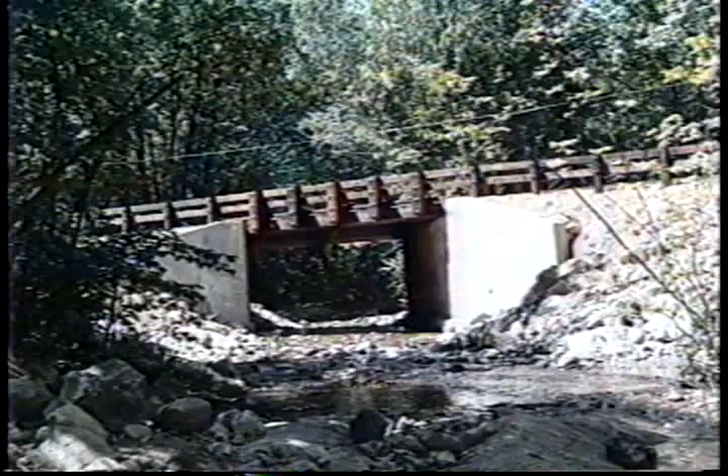Recognizing this threat to America's crumbling infrastructure, the United States Congress funded the Timber Bridge Initiative in 1989. Using methods pioneered in Ontario in the 1970s, over 200 demonstration timber bridges have been built across the country to show that small communities can replace their bridges in less time and with less money using locally grown, pressure-treated wood, rather than concrete and steel in construction.

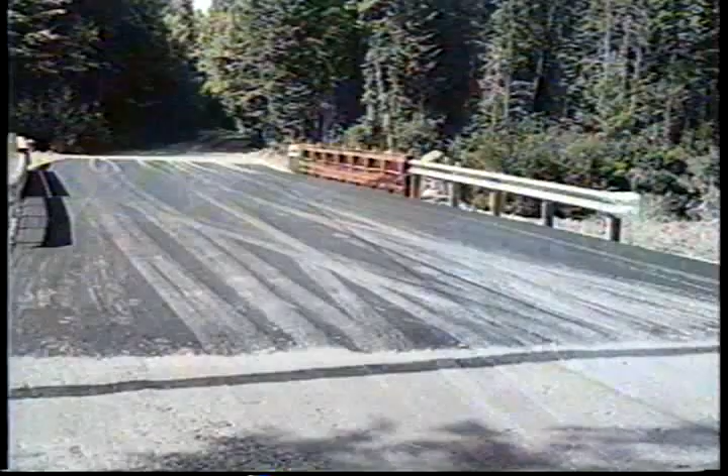Rhode Island RC&D is very interested in this because it does promote rural development. It has local people solving local problems and using local resources to do it.

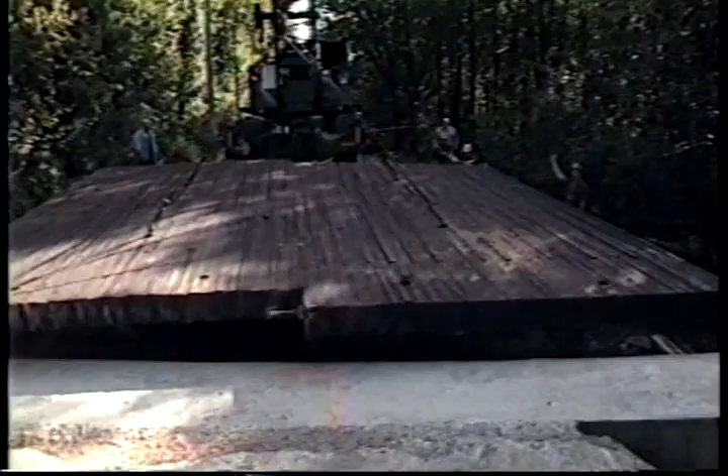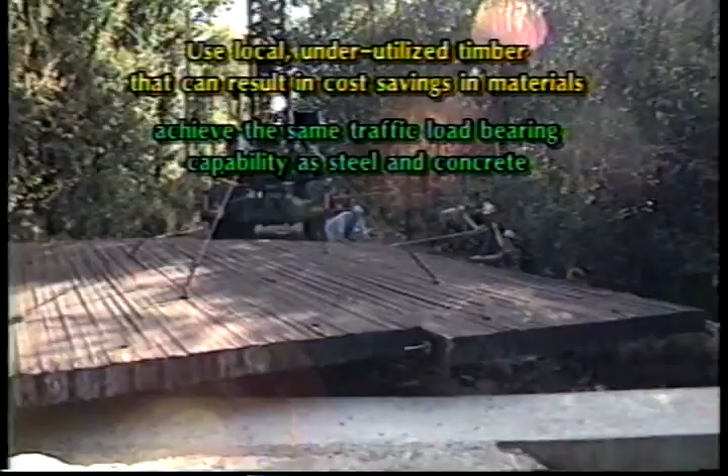In this video, you'll see how, through a collaborative effort of federal, state, and local agencies and businesses, a demonstration timber bridge was constructed in Foster on North Road, spanning 22 feet across a small river. You'll see how this bridge was engineered to use local underutilized timber that can result in cost saving in materials, achieve the same traffic load bearing capability as steel and concrete, be constructed with minimal equipment and by public works crews, be installed in a fraction of the time required for steel or concrete bridges, and reduce maintenance costs over time.

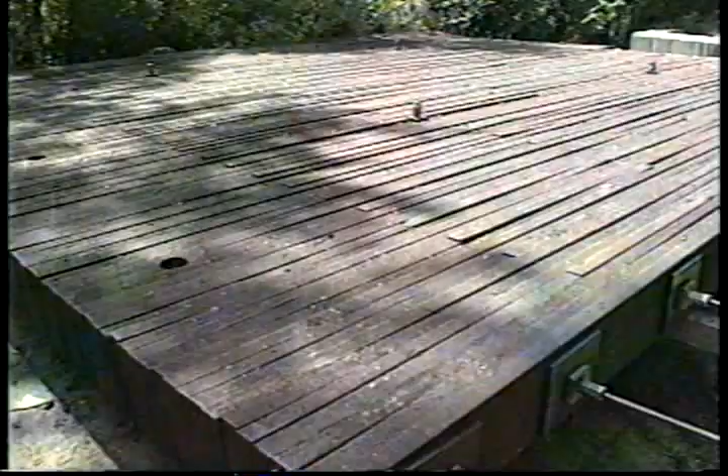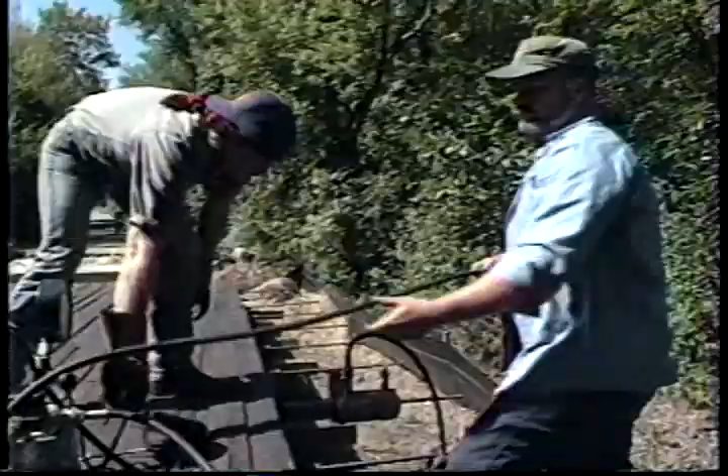In typical bridge construction, for a lot of the steel and concrete bridges, you have steel girders and then you have a deck. In this case, for the Foster Timber Bridge, you have 2x10 red oak planks, which are all bolted together with about, I think, 60,000 foot-pounds of torque. And it has plates pushing it together, too, with the nuts. And that makes it basically like one 10-inch thick plank. And it's incredibly strong. It serves as both the deck and the girders.

These bridges are not quite the old-style timber covered bridges that everybody imagines. You could put that type of structure over one of these. They look pretty modern. They are contemporary looking in their design now. You will still be able to tell it's wood. It'll be covered with asphalt, so when you're driving over it, you won't know it's wood.

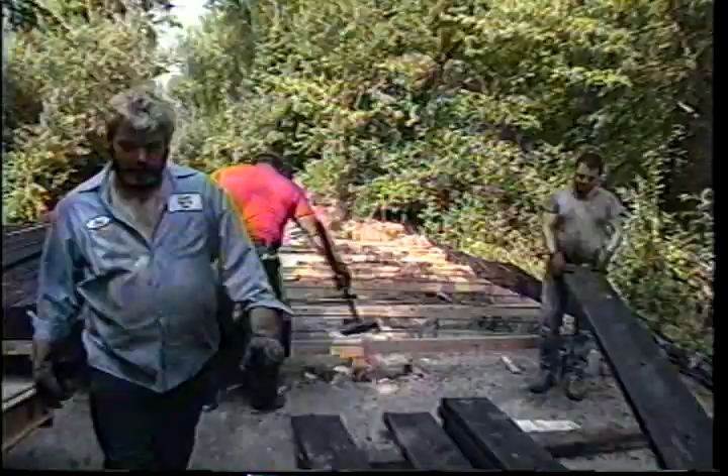All of the bridges in Rhode Island traditionally have been designed, that is, interstate bridges and every other one that we've had a part to do with, for what we call a 20-ton two-axle vehicle and three-axle tractor trailer that weighs 36 tons. And this particular bridge is designed to meet those loadings, and I think it may exceed those loadings. It'll be able to handle any of the normal traffic that a bridge would be required to take.

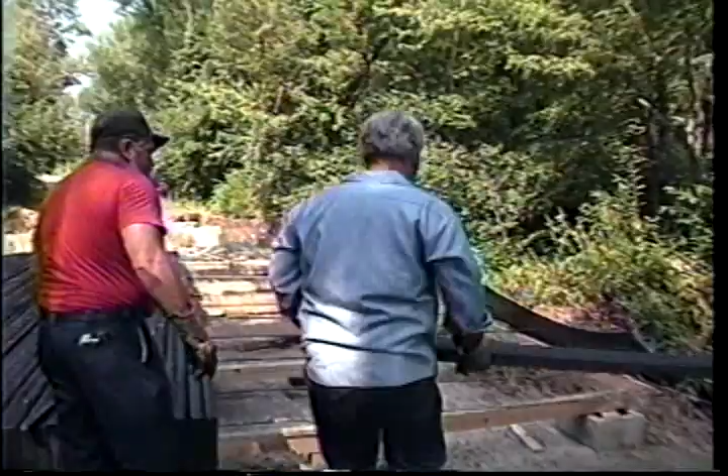A 20-ton capacity will be more than enough for school buses, emergency vehicles, and trucks passing through North Road. But the old bridge was only 14 feet wide, and the approach had a skew in it. Talking about a road realignment, widening the bridge, increasing the capacity, and changing the construction of it to accommodate an easier replacement when the life cycle of this bridge expires.

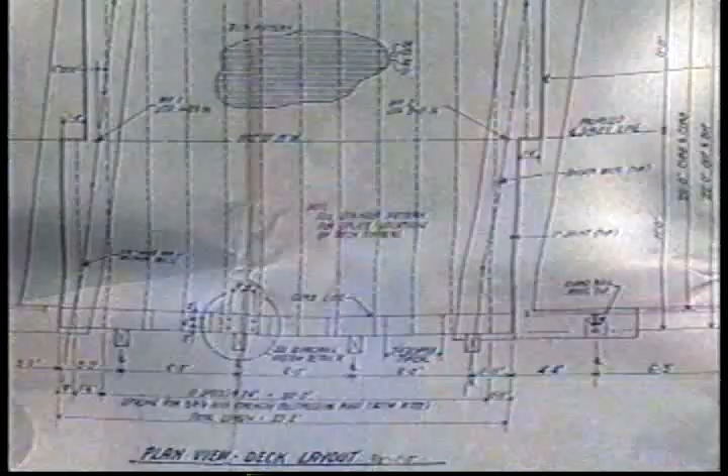Because the bridge needed more than a deck replacement, an engineering firm was brought in to survey the site and furnish detailed plans of the bridge specifications. We were able to furnish the town with not very comprehensive detailed plans. We tried to minimize the cost involved, but we gave them adequate plans so that they could build a bridge,

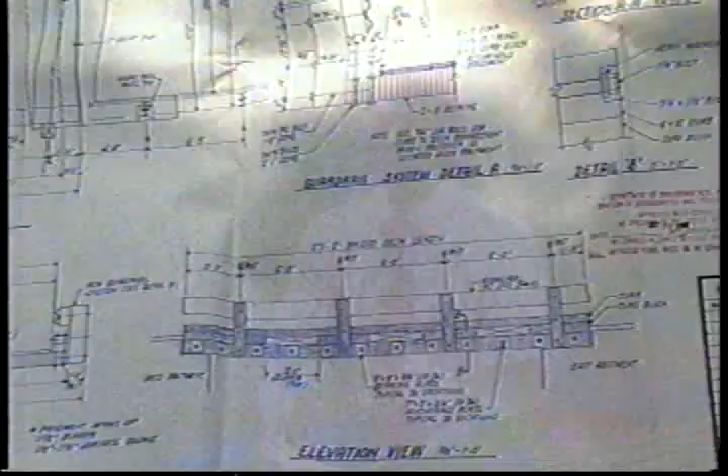from some set of engineering plans, which are required on almost all projects. Regardless of how simple the project may seem, to some degree you do need some expertise involved in planning the project and putting that down on paper.

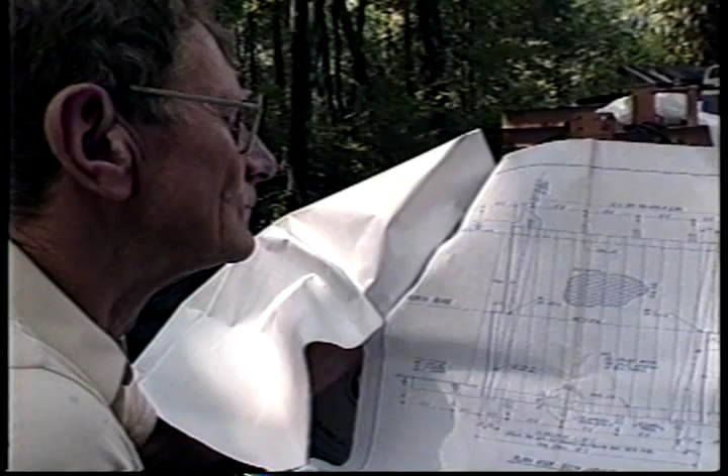On this particular bridge we're using 2x10s. That was all that was required for this span length, which was 22 feet. We are using red oak, which is native in Rhode Island, so the locals could inexpensively get the wood for the bridge. And in other states, they have used Douglas fir or southern pine or different types of wood.

So we have to actually do some tests to see the applicability of this type of wood for stress laminated bridges. The timber that we use right now is red oak. That's probably one of the most predominant species in the state.

Some communities right now are working on acquiring open space and making town forests. The savings there is that they don't have to go out and buy the timber, they already have the timber. They can just go to these areas, harvest the timber, and then utilize their own trees for their own bridges. In Rhode Island right now, trees are growing 3 times faster than we're taking them out. There's so many trees growing. Proper utilization helps us manage our woodlots.

We're at the Red Oak Tree Farm here in North Scituate. It's a tree farm managed by Steve Thomas, who does an excellent job managing his woodlots. Like many other tree farmers here in Rhode Island, these lots are where we come to find the wood. This is a northern red oak. It's about 36 inches in diameter.

Most of the trees that were cut for this timber bridge are right from the local area, Foster, Glocester, Scituate. We didn't go out and mark this timber specifically for this product. We went to the mill and graded it at the mill. Then we selected the better quality stock here, right in the Foster shed over there, to be treated at the lumberyard.

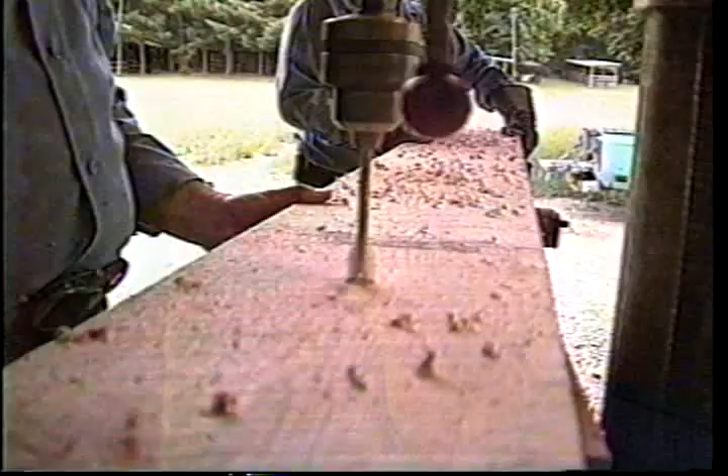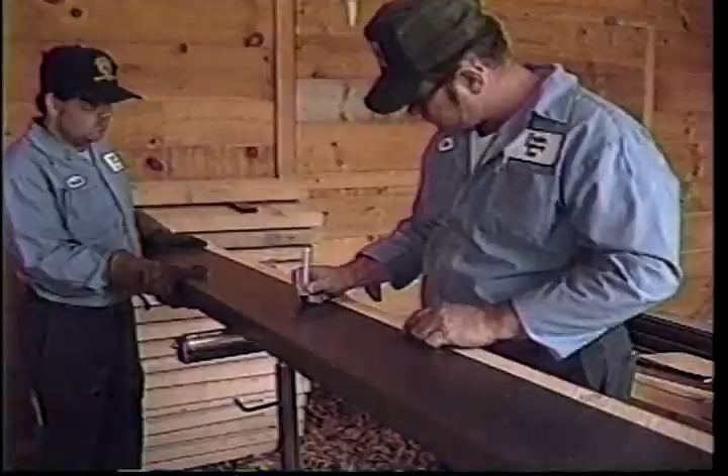What we do is we take the planks, these have all been sawed and squared. Then we lay them on the rollers and we put a template on there, mark the template, and then we slide them on the drill press and we drill the holes. Then after all this process is done, we send these out to be pressure treated at Permatreat out in Connecticut. The treatment of the timber is done right over the line in Connecticut.

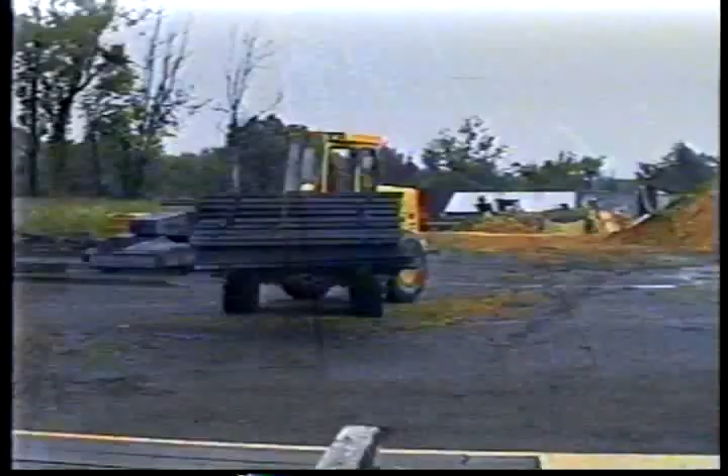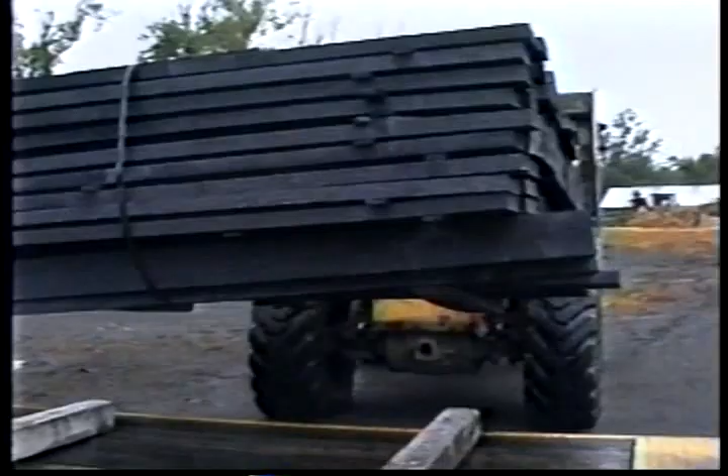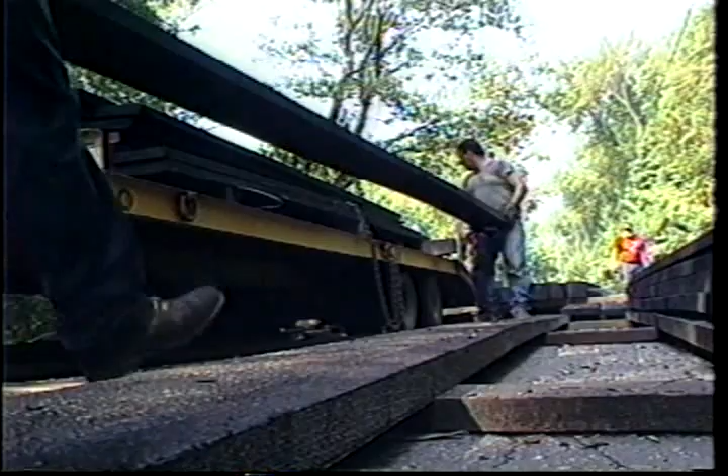That treatment is not as dangerous as it used to be. What we do is we have a clean treatment done. It means the creosote doesn't sweat, doesn't come out of the wood as easily. It's pressurized into the wood. And when you're handling it, you do have to wear gloves. It can burn you. But as for it dripping into the river once the bridge is built, that won't happen because it is a clean treatment. Well, the creosote pretty much keeps the water from getting into the pores of the wood and causing fungus decay and letting insects get into the wood.

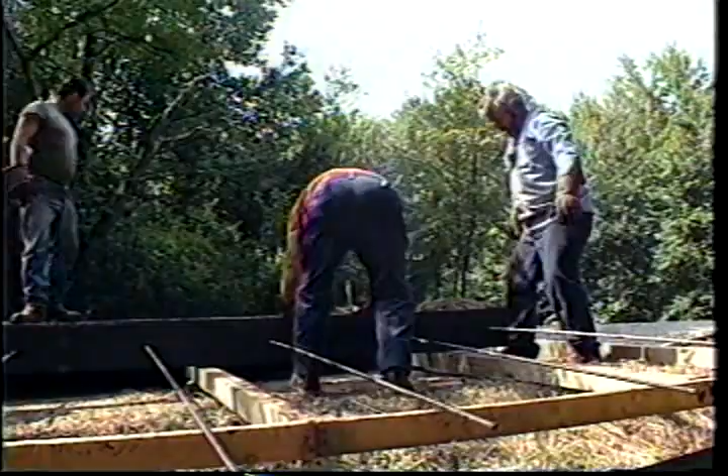What is supposedly unique about this particular type of structure is that, number one, it's pressure treated. Number two, it's pressure treated after the holes are drilled. And then number three, it is laterally post-tensioned to keep it all in compression, keep it all very tight and sealed off from moisture, etc.

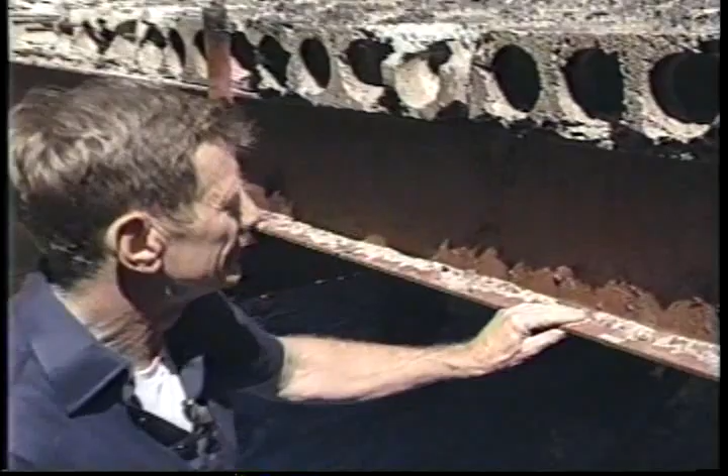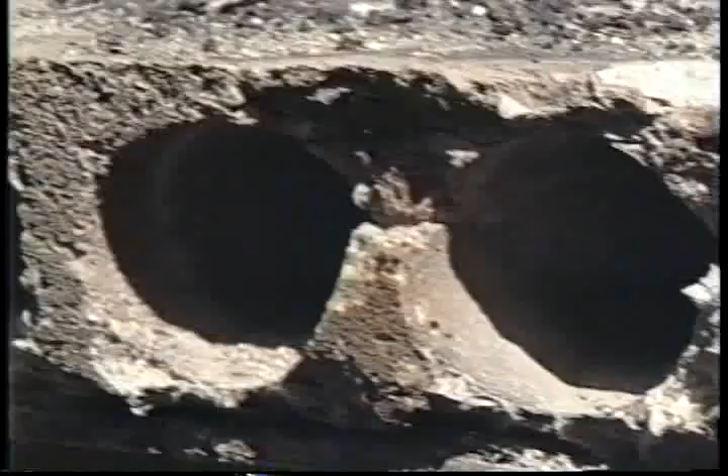The I-beam, you can see there's some deterioration here. Road salts and de-icing compounds are the enemies of concrete and steel bridges, and regular painting of the steel beams is necessary to prevent rusting. But pressure-treated timber bridges are unaffected by salts and resistant to moisture. Less maintenance means a long-term cost savings to the towns.

It should be a very low-maintenance bridge, and it's not affected by the elements. It's not affected by road salt. This bridge will have a covering of asphalt, which will protect it. If that asphalt starts to break up and crack, it should probably be periodically replaced. And this will protect against moisture intruding into the wood below it.

Concrete and steel bridges show deterioration, significant deterioration, in a period of, say, 20 to 25 years, at which time we have to get in and do something about patching and painting and fixing.

The Timber Bridge Initiative folk have indicated that these bridges will last 75 years. Another advantage to timber bridges is that they take less time to construct than steel and concrete. Once a wetlands permit is obtained, the abutments are ready, and the engineering plans are drawn up, the rest is just putting the pieces together. Ease of assembly means less downtime for the bridge, and a savings in labor and equipment.

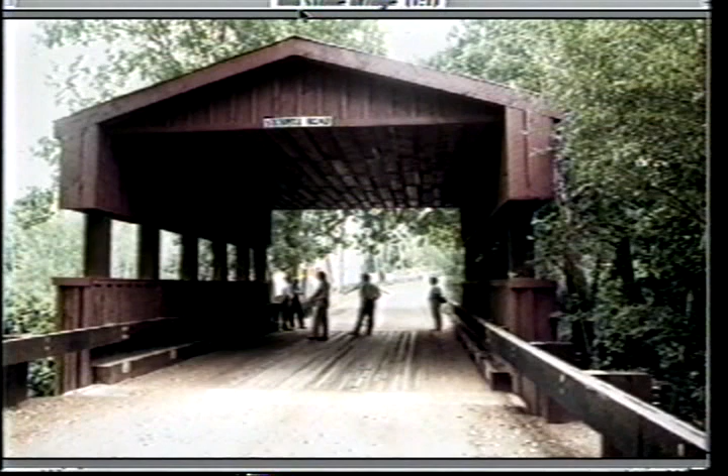The U.S. Forest Service reports initial studies indicate timber bridges cost approximately 20% less than steel and concrete equivalents. A timber bridge has certain advantages in that I think they can be built easily by a municipality that has a certain amount of skilled or even semi-skilled help to help put it together. It doesn't require a great deal of equipment, and most people know how to work with wood.

So I understand that it's possible to go ahead and install these bridges, to have the old bridge deck taken out and a new one put in within a week's time. We're talking weeks for steel and concrete, for the concrete to cure, and a lot of downtime where the bridge is closed in steel and concrete, where you can have it done within a week or 2 weeks with timber bridges.

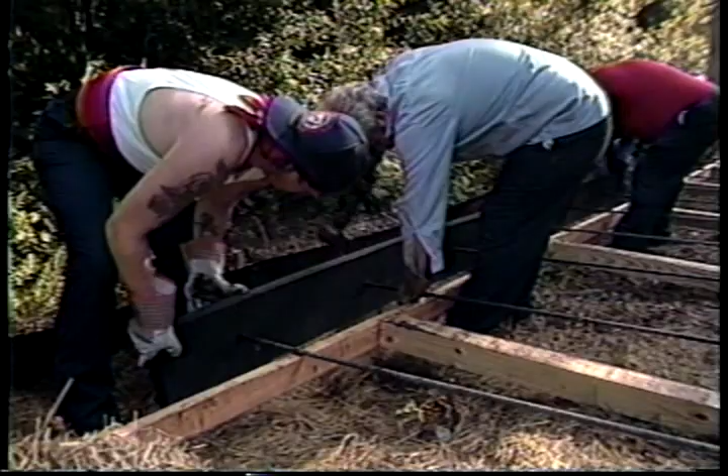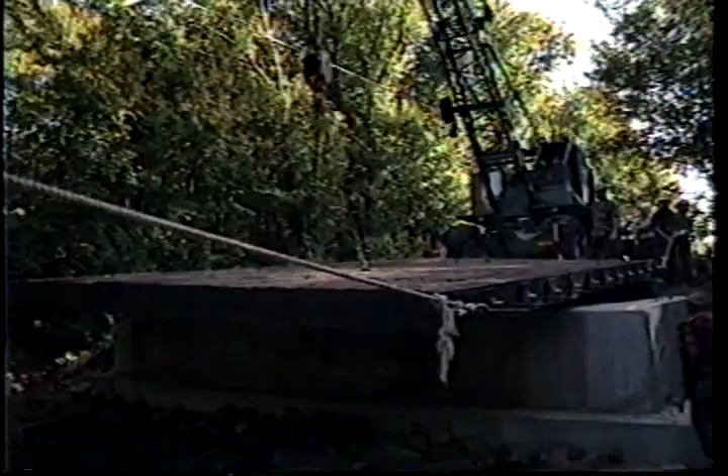Just because you're manufacturing the deck right there, you pull the old deck out, you make some cleaning up and some alterations, then you drop a new one in and put your wear surface over it. So it causes a lot less inconvenience to the motoring public, provides for greater safety in a much shorter period of time and less rerouting and detouring of traffic.

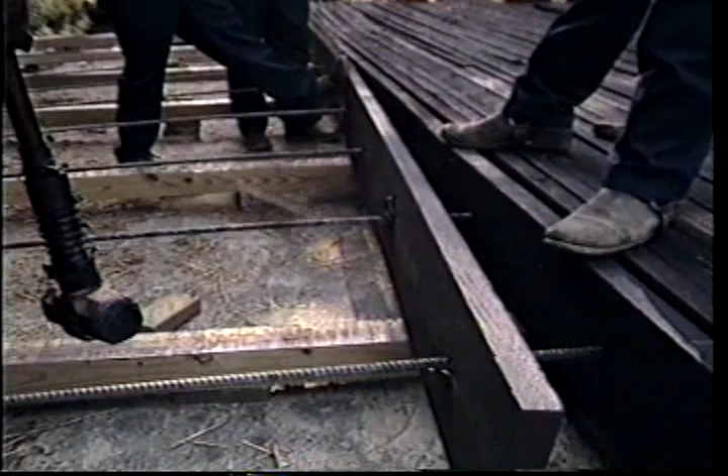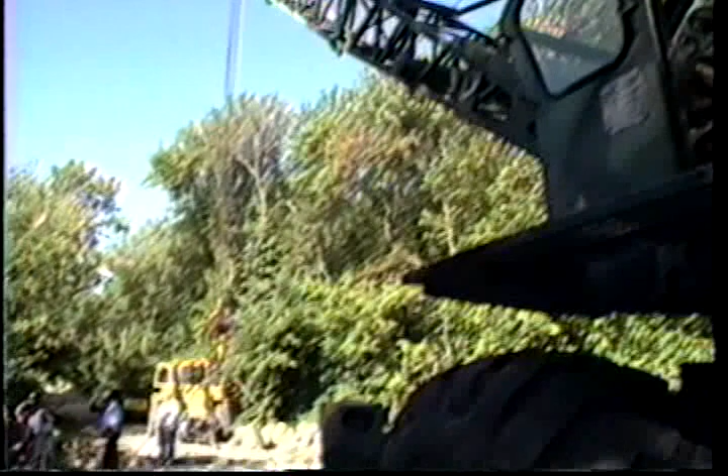There is a system of long rods, which are called post-tensioning rods, that go through these pre-drilled holes, and they're secured on both ends by a system of plates and nuts that compress the lumber. But I would expect that we should be able to assemble it within several days after we get the material on site, and I expect it not to take more than 1 day to hoist the bridge deck onto the new abutments and secure them.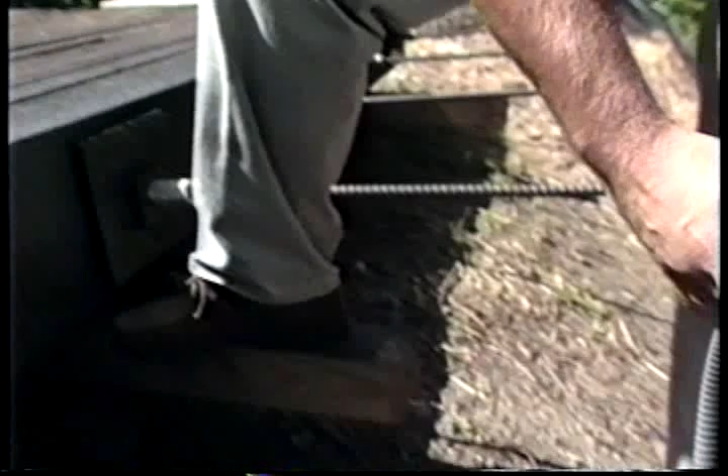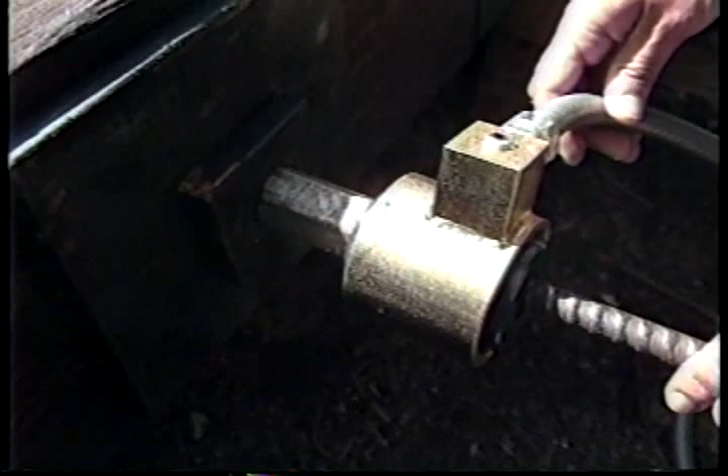There'll be load cells embedded in the deck of the bridge, and URI are going to come out here and do readouts periodically, and they'll be able to tell what the inside of the bridge is, how it's taking the stress. So what we will be doing actually is we'll use these load cells. We'll thread the load cell in the rods, and we'll be placing one more steel plate exactly like this one on the other side, and we'll be tightening the load cell with the force about 26 to 27 kips. And we'll be monitoring this force using a load cell readout box.

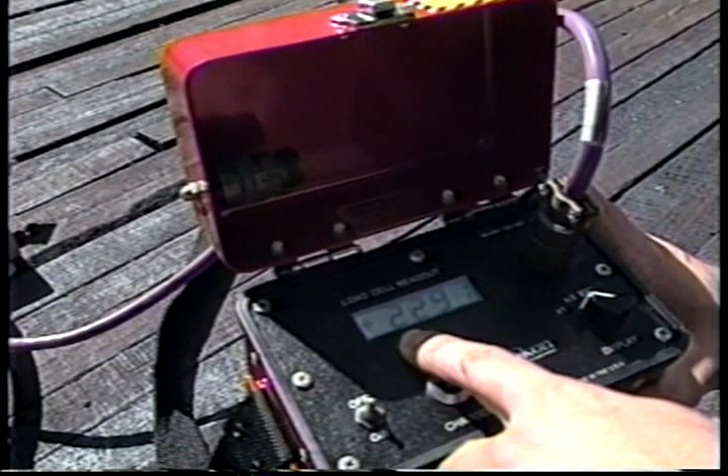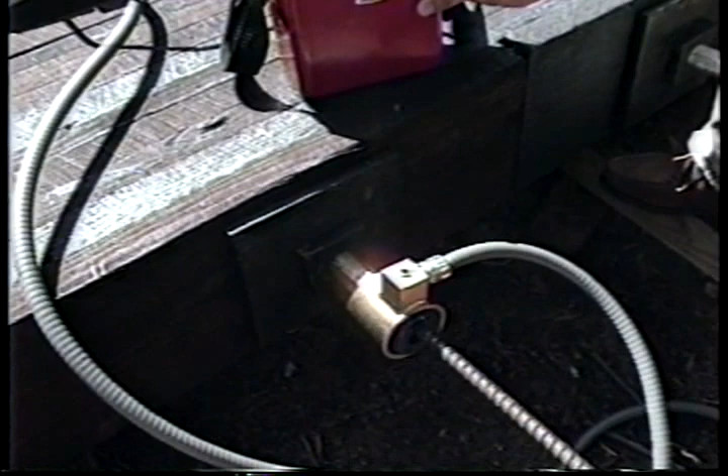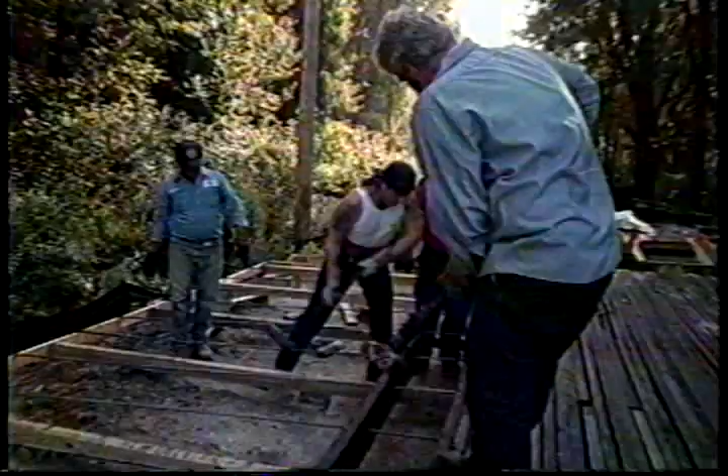We'll be taking a reading before we install the load cell, and then afterwards once a month, and by the difference between the two readings we can figure out how much is the force and how much does it change. If there is a need in the future, we can come back and restress those rods to their original force. And cooperative extension at URI helped to get engineering involved, and by doing this post-testing we'll be able to see how the bridge is changing, what needs to be done to keep it up, and it will provide a really good record for other bridges as to how to handle the bridge after it is constructed.

From the community revitalization point of view, it's mainly getting the community to think that it has a resource that it can do something on its own. We've proven here with some measure of success that public works people do have the skills necessary to build one of these. They'd rather be doing this than some of the other tasks that they have to do. After they retire from this job, they'll be able to run their grandkids over it. And I built that bridge back in the 1990s.

The Timber Bridge Initiative here I see as a boon to any municipality that has the resources and the talent to get involved with these. It's a renewable resource, wood. With average mechanical skills, local people can do it. It would promote local economy, and it allows the municipality to replace part of their infrastructure that's been deteriorating for years.